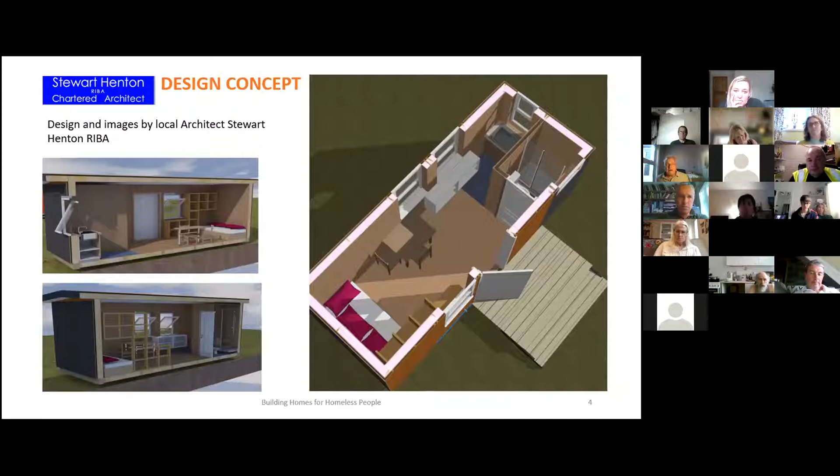Hopefully on your screens you can see some 3D images. Basically we were trying to come up with a structure that was about 2.5 meters wide and no more than 6 meters long, so that it could be towed legally behind a normal vehicle. It doesn't have wheels, it is self-supporting, but it can be put on a trailer, as we'll show. It is self-contained - it has its own loo, kitchen, sleeping, living, and everything. So everything a person needs is in this unit.

It's very well insulated, and it is constructed in SIP panels - structurally insulated panels - which is basically a sandwich of two pieces of sterling board with insulation bonded in the middle. They are very, very strong components, and they're jointed together, with ring beams at high and low levels, so the whole thing is so rigid you could lift up one corner and it wouldn't sag anywhere.

It's made to be low impact on the environment. The foundations are ground screws, so we don't have to be involved in any concrete in the foundations. It's well insulated, the windows are triple glazed, and the roof is like a Hypalon material, EPDM, so it's very long lasting.

We were very meticulous about airtight construction, so we had a Tyvek barrier. In the fit-out we want to include mechanical ventilation with heat recovery, so that you can have a continuous supply of fresh air without losing any of the heat.

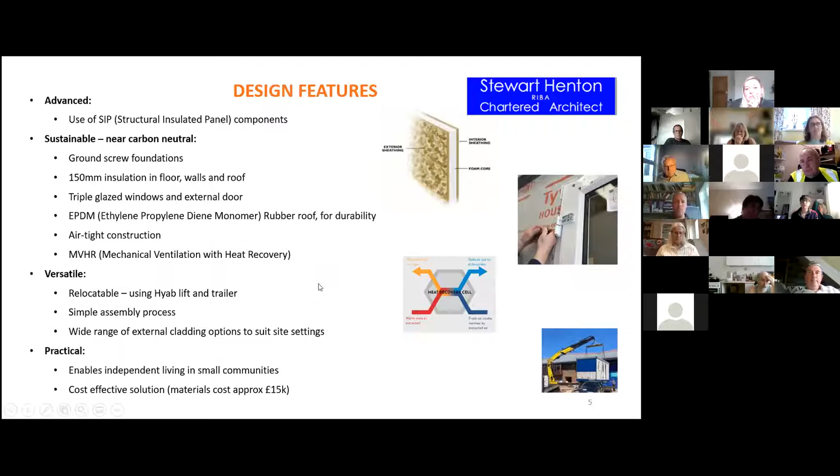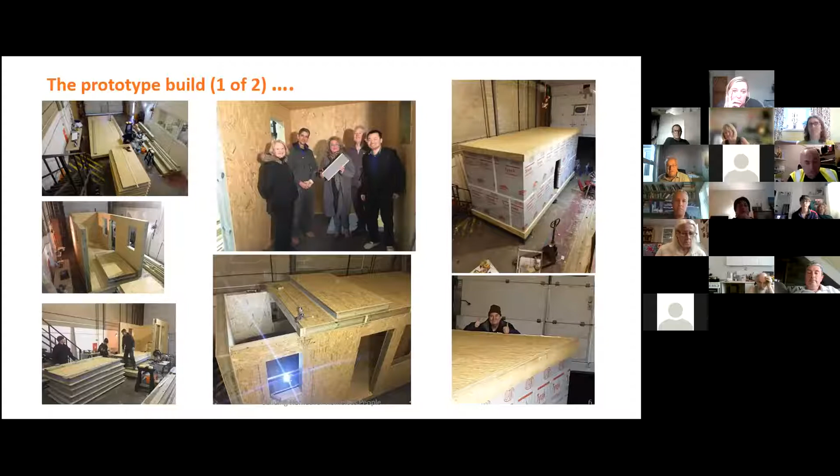So this gives an idea of how it was put together. It can be done by anybody, but it does need to be done correctly, and it has to be done accurately - otherwise you'll find you can't fit things together.

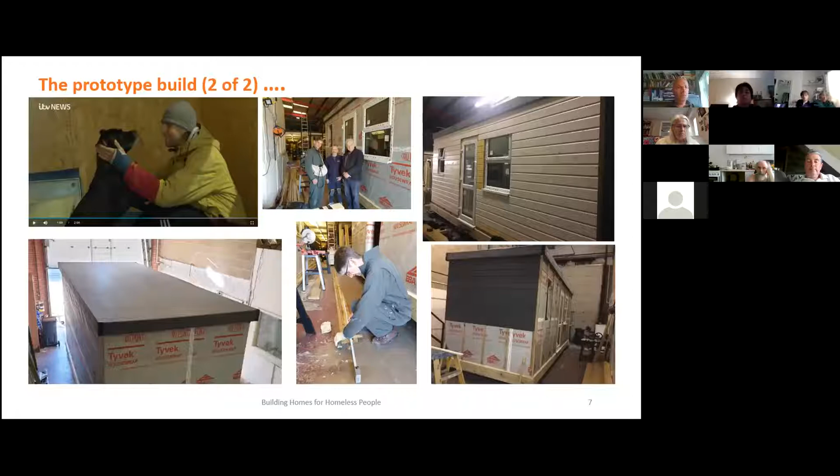In the final stages, although a lot of the build was done by the architect Stewart Henton, Jim, myself, my son, and various others, there were also some of the homeless clients involved. The one in the top left-hand corner had broken his wrist and couldn't work, so he'd been homeless, and he was actually helping us with the build.

So these are relocatable. We moved it around the workshop and supermarket on little movable four-wheeled caster trolleys, and it was lifted onto a trailer or lorry with a lorry-mounted Hyab lift, so it can then be towed around.

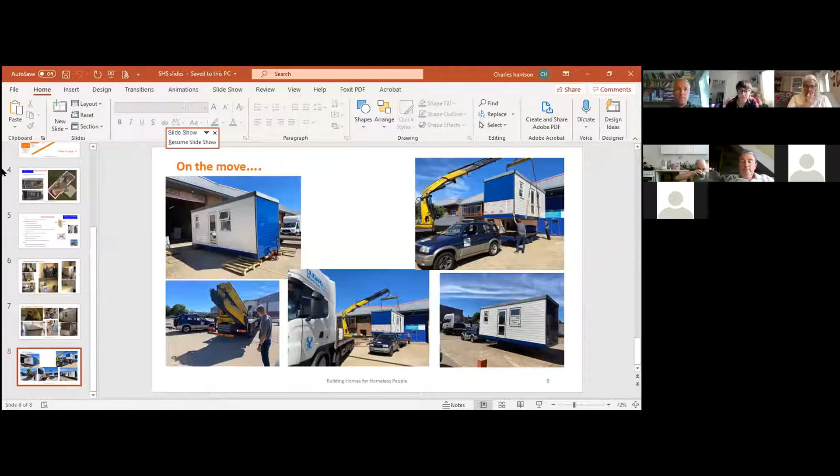If anyone has any questions, perhaps you can put them in the chat. We've got time for a couple of questions. There's one from Sam: Jim, this looks like a fantastic project. Has any consideration been given to using non-toxic renewable construction materials for the SIP panels on future design iterations?

Yes, I appreciate there are some limitations of SIP panels in that it's basically wood chippings glued together, and the insulation is a foam insulation. I think this is something we could do with some help and advice on. There are other materials you can make panels with, like cross-laminated timber—one of the organisations under the CLT has used those very successfully, but there may be others. I must admit, I've gone off Kingspan in the wake of Grenfell. I think they came up with the concept. So it's something we'd like to look at. Hopefully that answers your question.

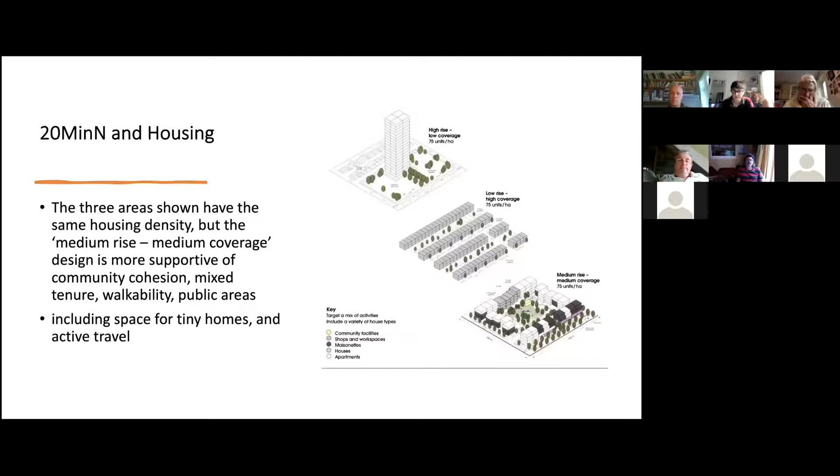The 20-minute neighbourhood - this is an interesting slide showing different densities. All three of these areas have the same housing density, but the bottom right one, the medium rise with medium coverage design, is much more supportive of community cohesion, mixed tenure, and public spaces, and could, if designed and planned at the beginning, accommodate tiny homes so that they are part of a community rather than a standalone experiment, which it might well otherwise be.

You always need a range of different types and tenure of homes, something that most councils these days do not really take into account. They look much more for the highest price they can get for the properties that they sell, and it's tragic, but we need to be addressing that as much as we can.

I can't really not mention permitted development. I hope you're all familiar with this - you may or may not be, and it's a mixed blessing. It could be a blessing because it's an easy route to getting people into houses, or into homes, inside anyway. But as from the 1st of August this year, the latest deregulation of the planning system now says that any building of less than 1,500 square metres can be converted into housing. Minimum space standards may or may not apply, but there will be no careful consideration, as we've seen for the tiny homes approach, on how the space is used.

It does mean, interestingly, that even somewhere like Debenhams in the heart of Churchill Square could be converted into housing. So I think we all have to be very aware that just getting people inside houses and creating homes is not necessarily the only answer. It's where they are, and also that they are included within the local planning system, so that the health services, the doctor surgeries, the schools, the transport people know that they're going to be there.

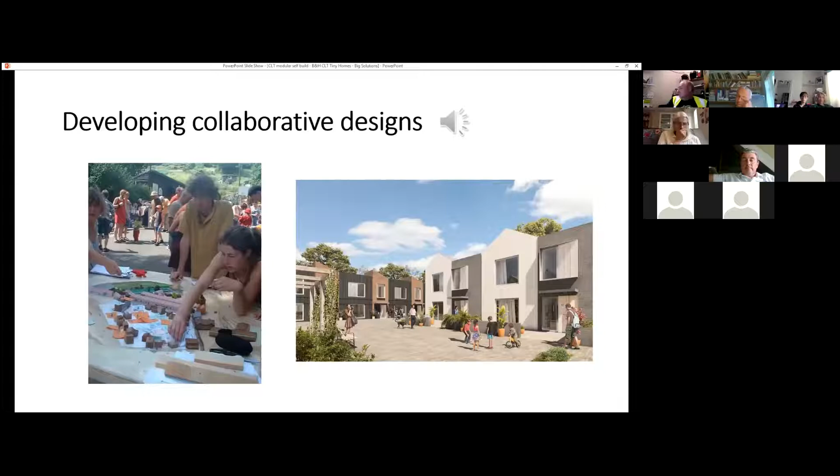Collectively, the micro-community of self-builders will be assisted with clarifying their requirements, designing their house layouts, the communal and shared spaces, and access that meets Secured by Design standards, creating neighbourhoods with a strong communal bond, in homes matched to their needs with the ability to grow or evolve as required.

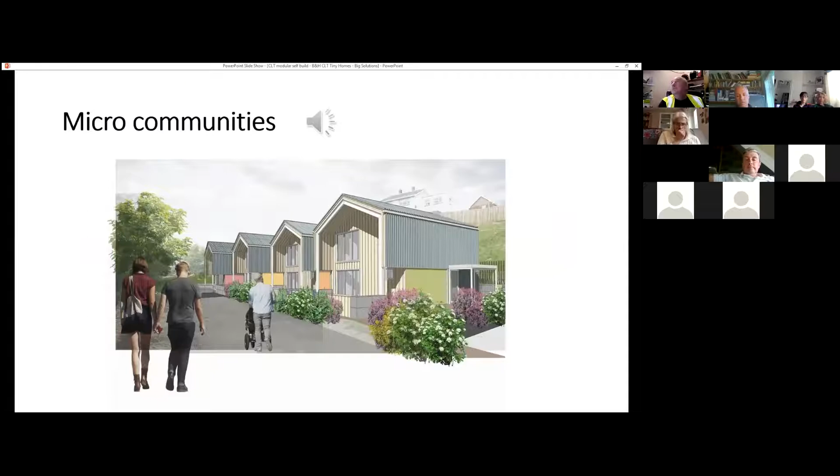First-time buyers are able to build what they need in a very affordable way, and then grow the home as finances allow and their needs change.

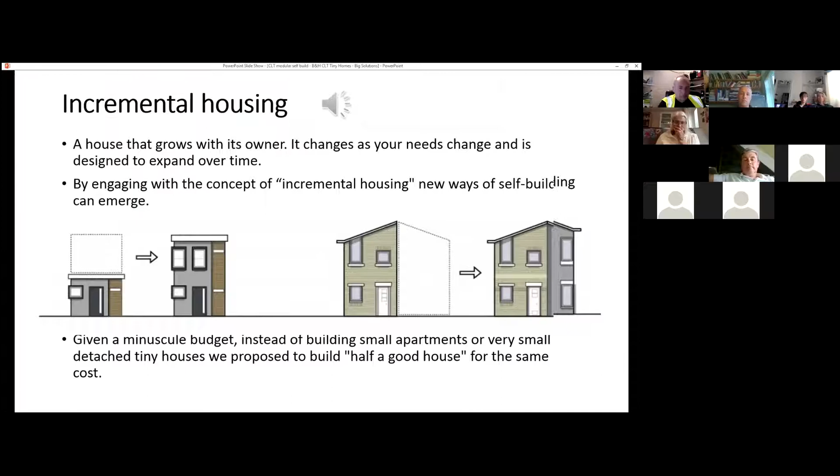A cheap, very affordable basic house can be grown into a more desirable home, by investing the financial savings made because of the small loan repayments compared to rent, and the low running costs of these houses, into improvements and expansions.

These modular design timber frame homes are sustainable, super insulated, customizable and structurally sound buildings, designed to take advantage of small, awkward or sloping sites. This means significant savings can be made when purchasing land.

A training workshop will provide the wood fabrication and health and safety skills required to build the panels for each house.

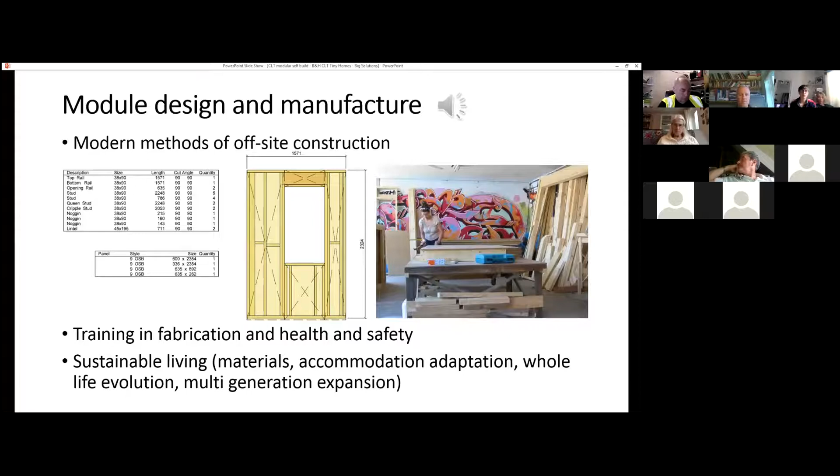Standard section timber and board is used, which means materials availability is simple. It even provides the potential for recycled second-hand timber to further reduce costs.

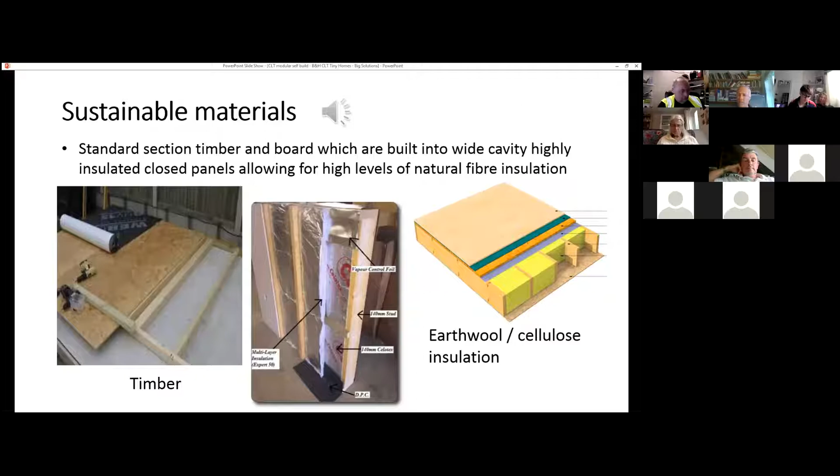The design allows for a high degree of flexibility, including expansion or contraction of the living space. Even reconfiguration of the interior is simple, and reuse of panels on another building is possible.

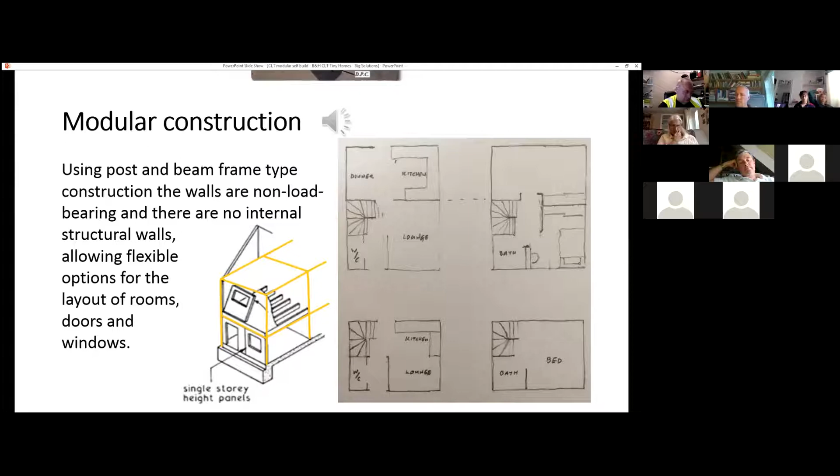The final appearance of the house, shape and cladding, can easily be adapted to meet local planning requirements.

The lightweight nature of the design also means there is little need for expensive concrete foundations, which results in a large cost saving.

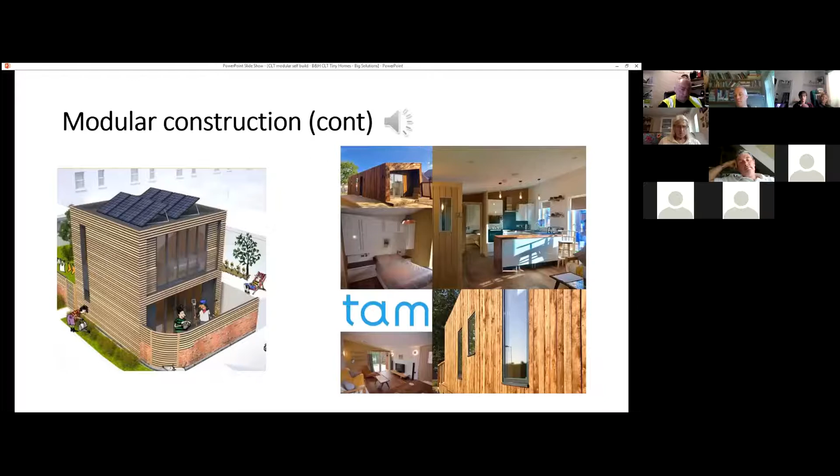The post and beam element of the timber frames can also be tailored to the slope of a site, creating an undercroft for storage at the same time as significantly reducing groundwork costs.

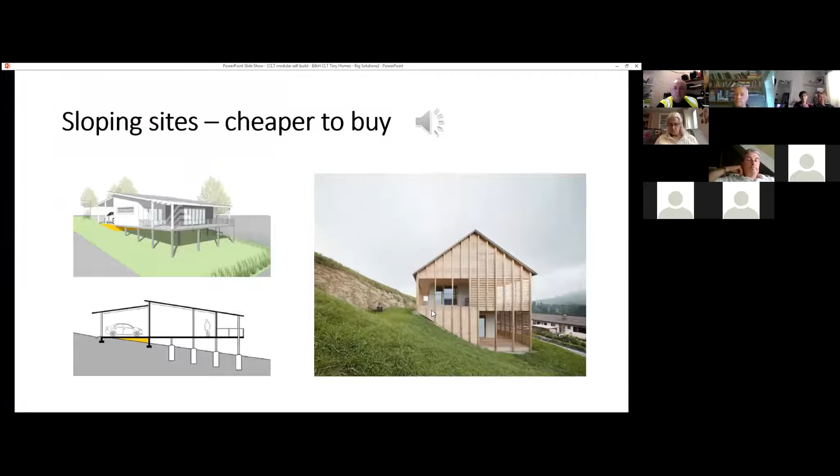Okay, so that's just an overview of one of the projects that we're doing at the Wyre Forest CLT.

Part of what we're in discussion with the local council about is the idea that it's perfectly possible to build a very small 16-foot by 12-foot unit as a starter home, single story, and that becomes the downstairs half of a house. You extend it at the back to double the size, putting a larger kitchen and dining room on the back, and then upstairs, where you would have had a loft bedroom and a bathroom, by extending at the back you can add either two more bedrooms or one very large bedroom, ensuite and dressing room as well. So the houses themselves can be expanded, and that's part of that concept of working with low-income families, single-parent families, low-income individuals.

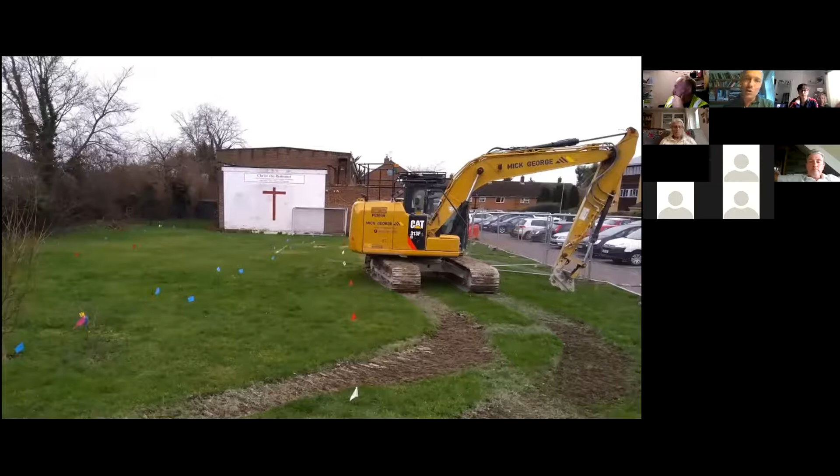Anyway, the vicar and the church are very happy to let this site be used because they knew it was going to be redeveloped. Cutting a very long story short on planning - I can talk about the sizes, the 25 square metre units we use, which were deemed adequate by the planners after a bit of a battle. We had to set a bit of a precedent, which has now enabled other stuff to be done on that basis. So smaller than the space standards, but not permanent dwellings - 18 months or 2 years is seen as okay.

Although the residents in the scheme, which I'll show you in a minute, generally really like the units, and some of them say they want to live there forever, which is going to be a bit challenging when we pick the units up and move them to another site. But we may let them stay, if they haven't found somewhere else, for another period of time.

Anyway, we didn't have a big budget, so we got some help, pro bono help, which is always useful, from Groundworks and the recycling company Mick George. They did some digging and they gave us some concrete.

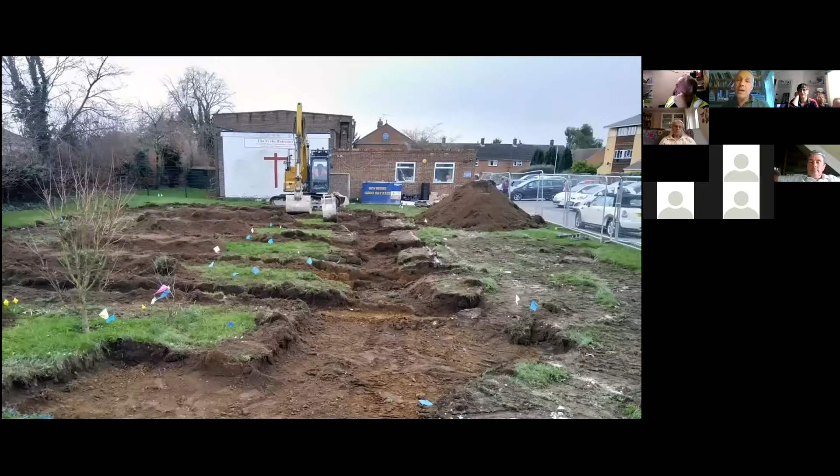And the challenge with the tiny homes or the temporary homes, if you're talking about land that's only going to be on a meanwhile basis - because we couldn't have afforded to buy or rent anything, land was lent to us free - we still have to do the infrastructure, a bit like a normal housing project. So it's sort of 75% of the effort of doing what you would do in a full-scale scheme, which means mains electric, mains water, and mains sewerage, unless you can exchange one of those for a temporary electricity supply or batteries supplemented by mains, a lower power mains system, or a pressurized water system using a low pressure supply, or a sewage digestion system.

But all of these in an urban context we didn't need, because we hooked off the church electric and there was a sewage main running just down the car park. The only thing we had to bring in new was the mains water, which was the same price as buying a pressurization system. So all the piping had to be put underground at standard depths to avoid freezing and to avoid overheating in the summer. And the build proceeded - we used screw piles, there they are.

It all looks a bit of a mess because we offset the units to create some interest rather than having them in a straight line. But the screw piles were very good, other than the ground being too hard last summer and the screw pile people breaking a couple of their machines.

These were the units as they came out of a fabrication warehouse lent to us by a local developer. The charity that built them is called New Meaning Foundation. They train local young people and some ex-homeless people on the build, but we couldn't build them on site. I'm intrigued about whether we could create a fabrication setup on any given site. We've heard about flying factories in the past, but you need a lot of space to build these 6 units, so it was easier to build them in a controlled environment and bring them down on a truck.

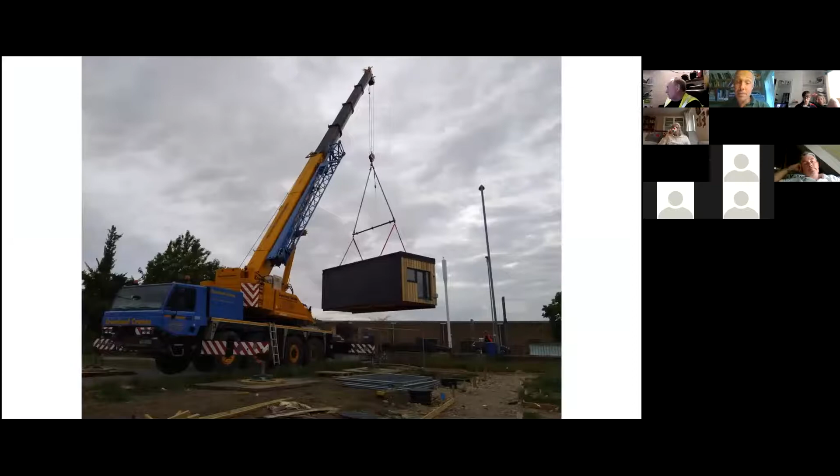They were all craned onto site in about 6 hours in mid-May, and the scheme was up and running fully, with everything connected and landscaped, within 4 weeks from that delivery day. So all the effort really is in the planning application process, which took about 4 months. It had to go to planning committee because a bit of a precedent was set.

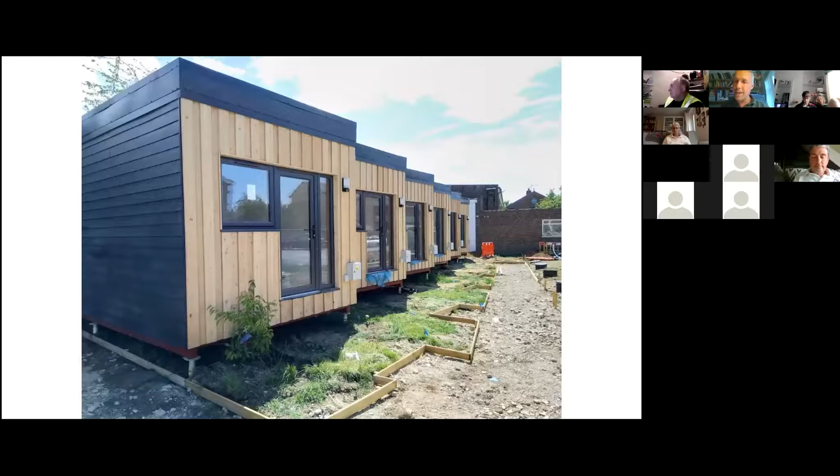They've been selected to be the kind of people who get on and are willing to live in a bit of a community. There's an informal warden, one of the residents, ex-homeless themselves, but with a bit more ability to be responsible for the community, acting as a first responder if anything happens. There's been no problems at all in the whole last year.